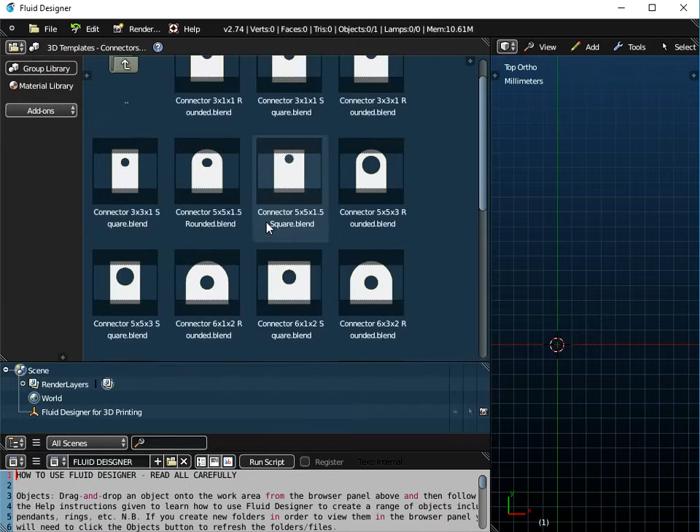In this video I'm going to show you how you can make these Voronoi earrings, which are personalised in this instance with the letter W on it, but you can put any letter of the alphabet, using Fluid Designer for 3D printing. So we're going to add a connector, so we're going to use this object here.

We're also going to use a Harrington font, and I'm going to use the W. And we're also going to use one of the patterns that are available if you purchase Fluid Designer for 3D printing. We're going to use this Voronoi pattern.

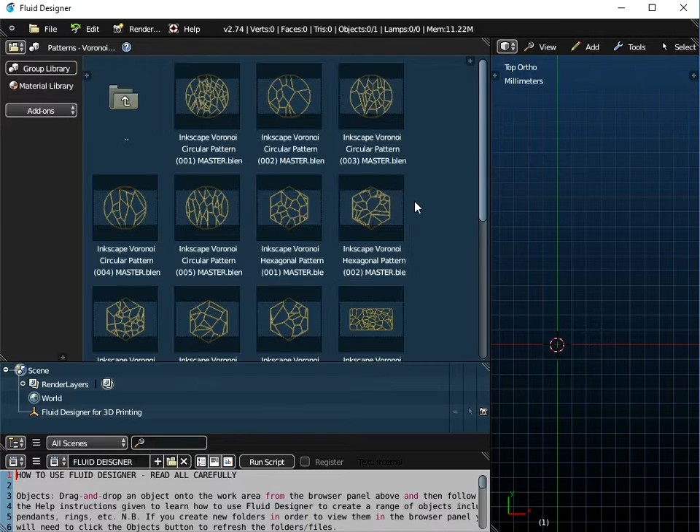So I'm going to use this circular Voronoi pattern here, and if we look at the size of this, it's quite large at the moment. It's 50mm by 50mm. So what I'm going to do is I'll just switch on screencast key, so key presses I make should be down here.

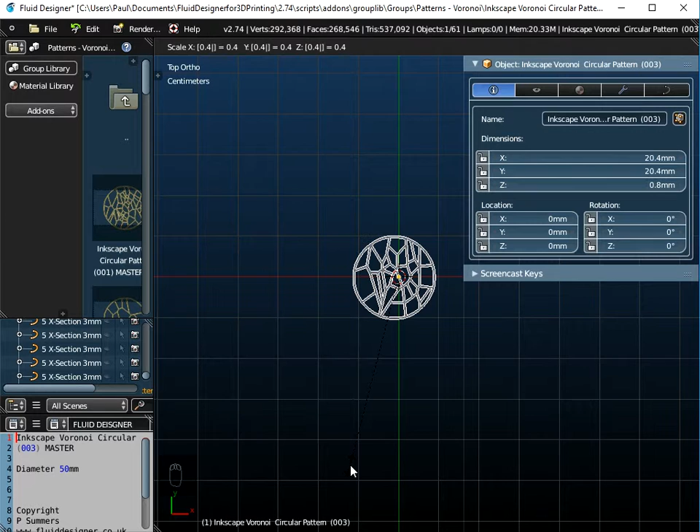So I press S on the keyboard for scale, and I'm going to type 0.4 and enter. Now whenever you scale an object like this in Fluid Designer, always do Control A and apply the scale, and you'll notice that the thickness returns.

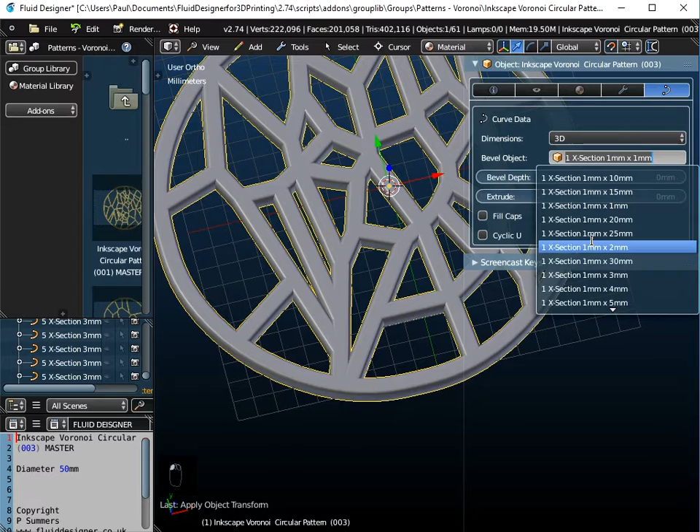Now at this moment in time, the cross section of this object is 1 by 2. Because we're making earrings, we want to thin that down a little bit. This is a parametric smart object. We can change the thickness if you wanted to make a pendant. We're going to make an earring today, so I'll take it down to 1 by 1.

And if I just view that from the top there, now what I want to do is to just change the shape of this. So if I just press the tab key to go into edit mode, and I'll just highlight that one control point at the bottom. Now if I just pull that down, notice it doesn't pull the rest of the earring with it.

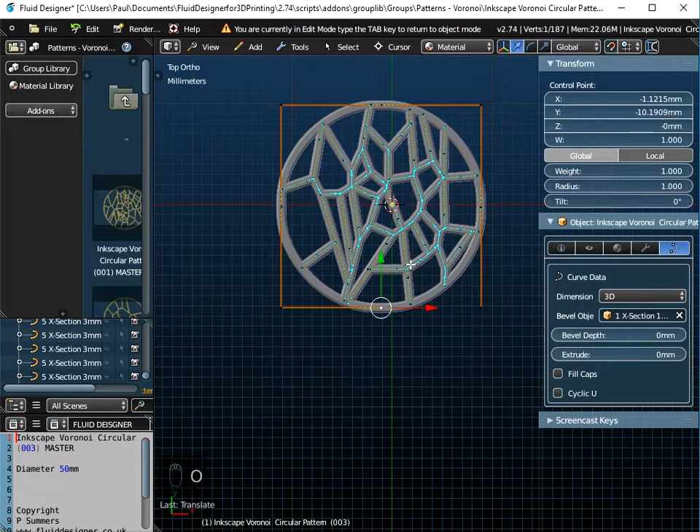So if I press the O key on the keyboard, and then start to pull, it's still not working, but if I scroll the center mouse button at the same time now, you can see it's starting to bring the rest of the object down with it. So you just play around until you've got the shape that you want.

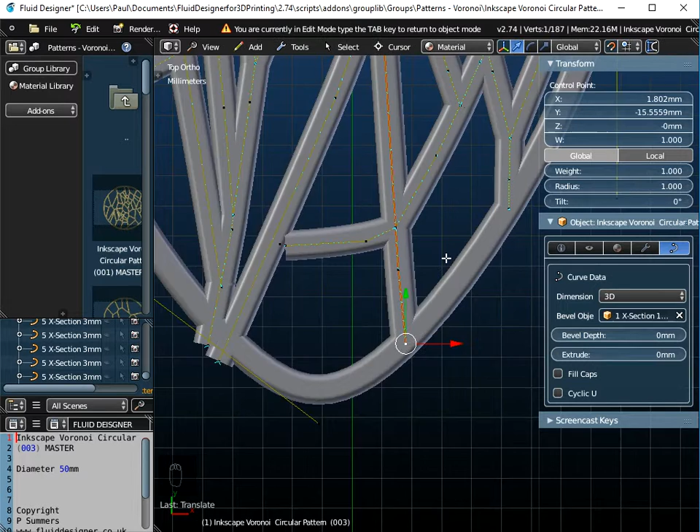Now we clearly need to reposition these points, and before I do that I must press O on the keyboard again just to switch off proportional editing, and I'll just pull that up. I think I'll probably need to switch the snap off as well.

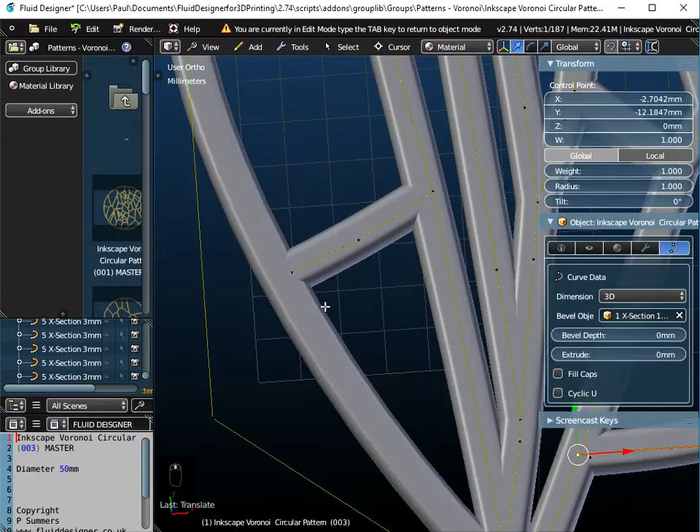And I'll just press G on the keyboard to grab that and reposition it, and reposition it, and reposition it, and I just need to reposition that point as well. And you just need to go around and just check that everything's still in place. It just depends how much you actually displace it. That looks okay at the moment, so I can come out of edit mode.

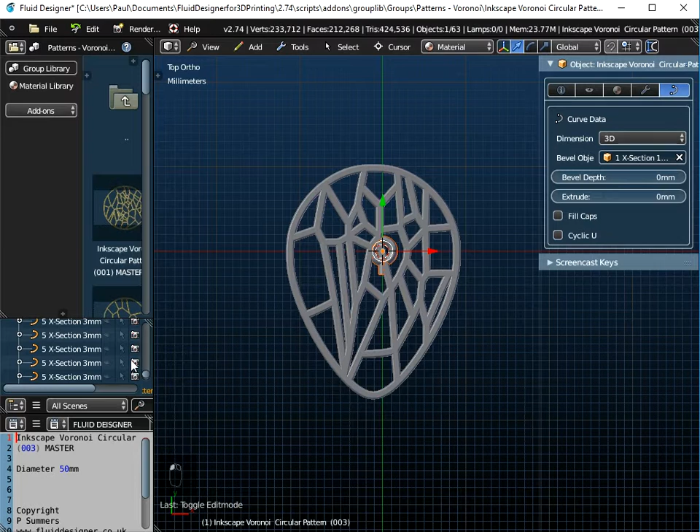And now what I'm going to do is I'm going to go to File and Append. And we always in Fluid Designer go up through the menu system until you get to Groups folder. I'm going to append the connector, and I'm going to append the wire connector with a 1.5mm hole. And just make sure that you've got it selected here.

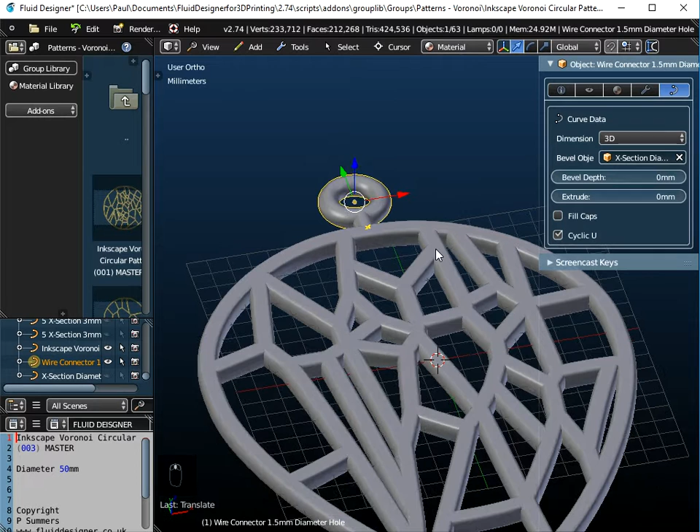And if I just pull that up, and I just need to position it accurately now. So at the top there, I'll just switch to wireframe, just check that it's in the middle here. That's okay. And what I can do now is if I hold down the shift key and then click on to my earring and go to Tools, Object, Tools, and join the two objects together, that will take on the shape of the earring.

Now the next thing I'm going to do is add a letter, a Harrington font. So again, I go to File and Append, go up through the menu system until you get to the Groups folder, look for fonts, so it's Alphabet Harrington font. I'm going to use a W font, so I just append that from the library.

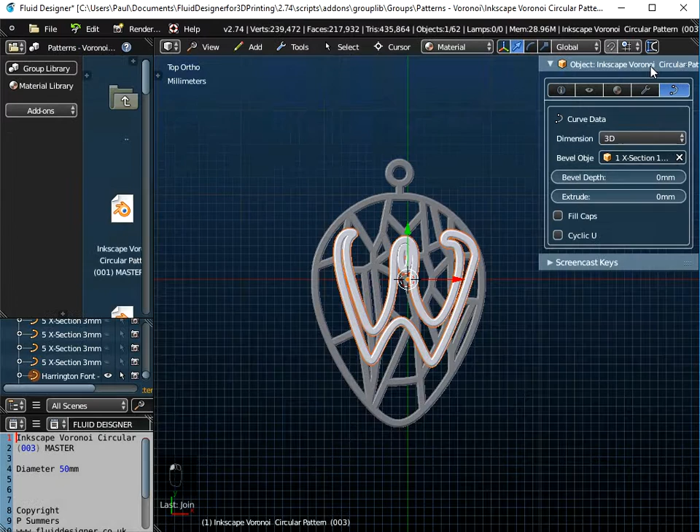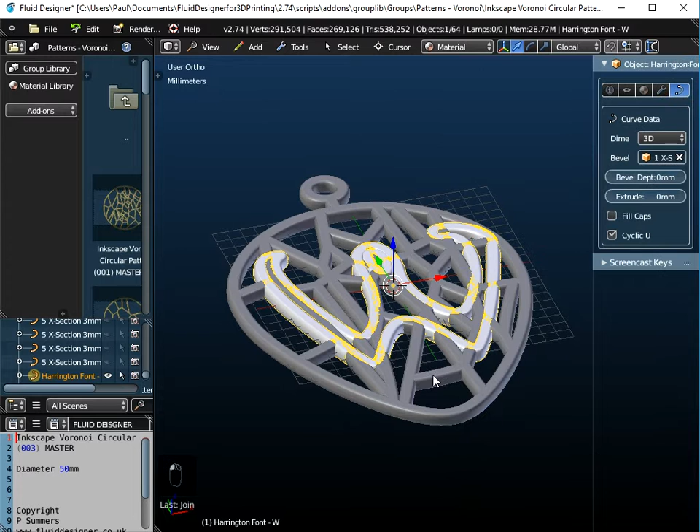You can see that the W font is thicker than the earring. The default thickness is usually 2mm. The W is now selected, as you can see there. Now it's 2mm thick, so I'm going to change that to 1 by 1, so it's the same as my earring. And if I just view it from the front now and zoom in and pull that up...

I'm going to protrude it so that it's about 0.8 of a millimeter, so there's just some overlap between the W and the earring. You can clearly just play around with the position of it there until you're sort of happy.

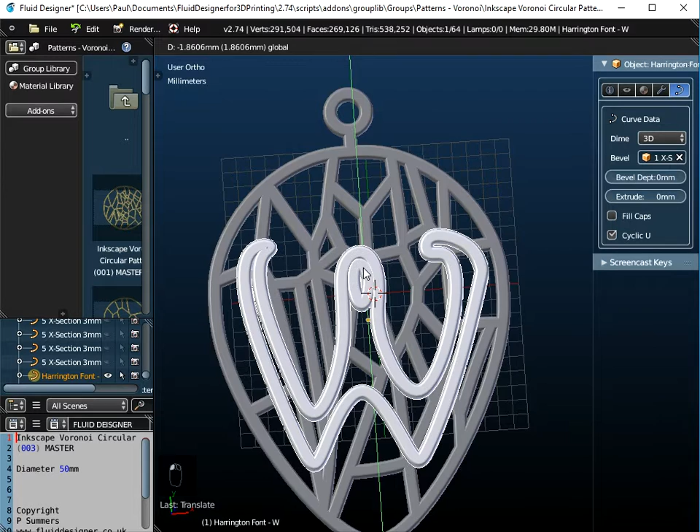Once you're happy with it, if you hold down the shift key and highlight the earring, go to Tools, Object, Tools, and Join, there's your finished object essentially.

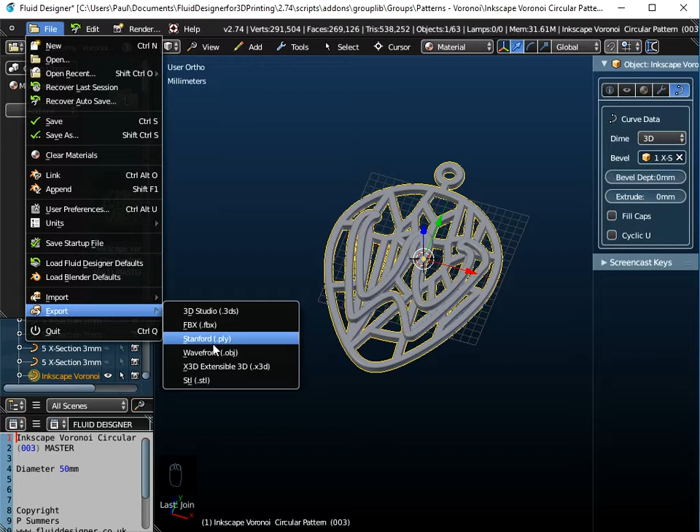And so that can then be exported as an OBJ or as an STL file. So I'll just call it Inkscape Voronoi pattern earring - you just got too many R's there - and so you just export that, and then what you need to do is run that through Netfabb Basic to repair it.

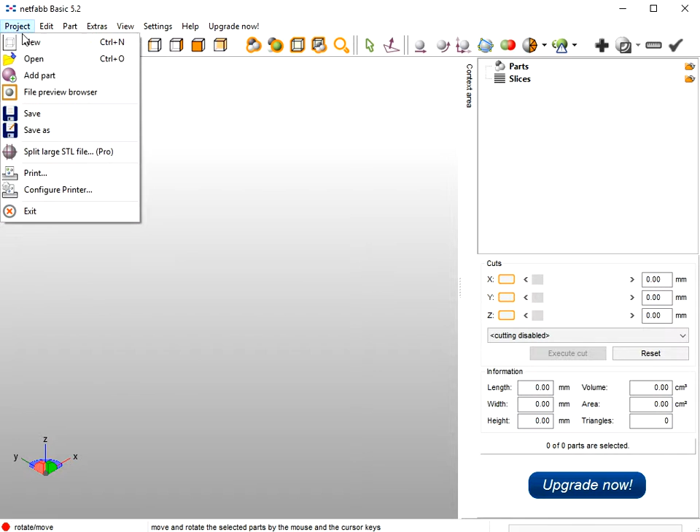Once that's saved, if you just go to Netfabb Basic, which you can download free from the internet, and open up that earring file from the desktop, in this case that's where I saved it, you just need to run through the repairs procedure in Netfabb Basic.

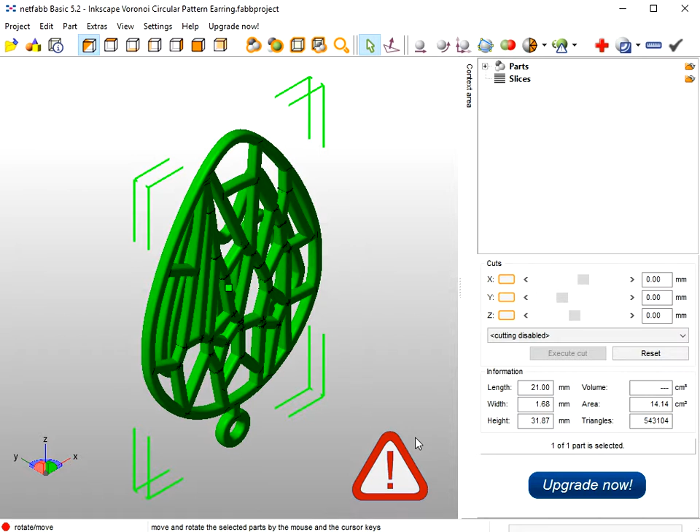It's always the case with Fluid Designer for 3D printing that you do get some minor errors, so we can see we get a warning red triangle. It's fairly straightforward, we just click the button there to see where the problem is. There's some edge problems and some holes. Just click automatic repair and execute...

And just wait for it to run through the repair procedure. Once this bar is at the end, we're going to click apply repair and remove the old part, and we should see that our object is then 3D printable.

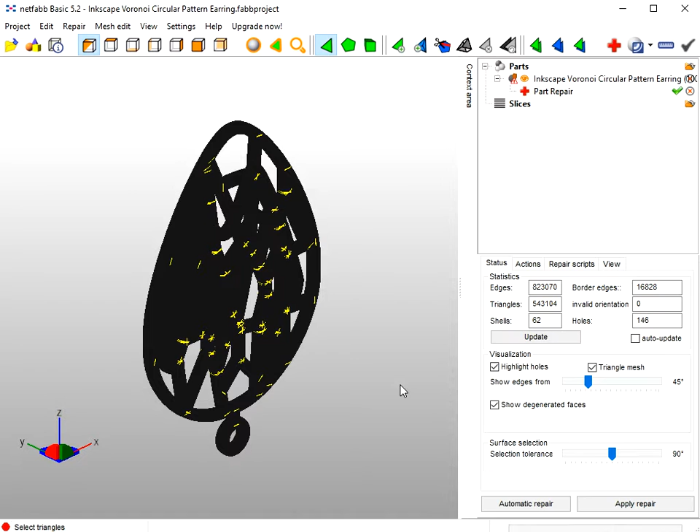So if I just click on update here, you can see there's no problems now. We just apply the repair and remove the old part, and you see our warning red triangle has gone. So you just export it as an OBJ, and I just save it on top of the original one there.

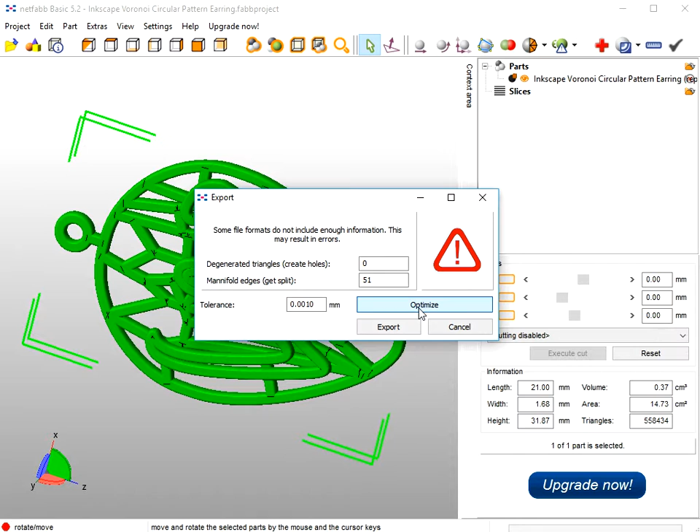You sometimes get another error message like this about manifold edges, but just click optimize, and Netfabb will make those repairs, as you can see with the green tick. So that's your 3D printable object.

Now, because this is an earring, it's a good idea in Fluid Designer to check the weight of this, and to do that you do actually need to convert it to a mesh first. That was still a curve object, and if you just open up the toolbox and go to 3D printing and click on volume, you're really looking for something about 0.3 or below.

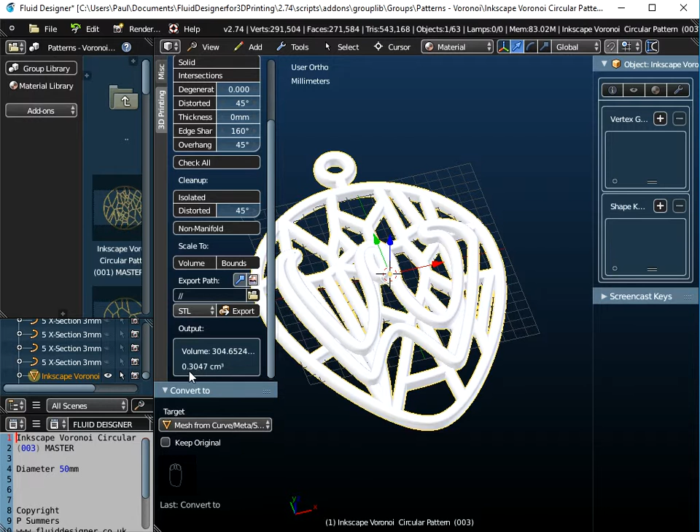That equates to about 3 grams, so you don't want this value too high. We could have always sized it a little bit smaller if we want to reduce the weight of this object below 3 grams, but that's essentially all you need to do. So you can put any letter of the alphabet on there, or you can put other objects from the system as well. So good luck.